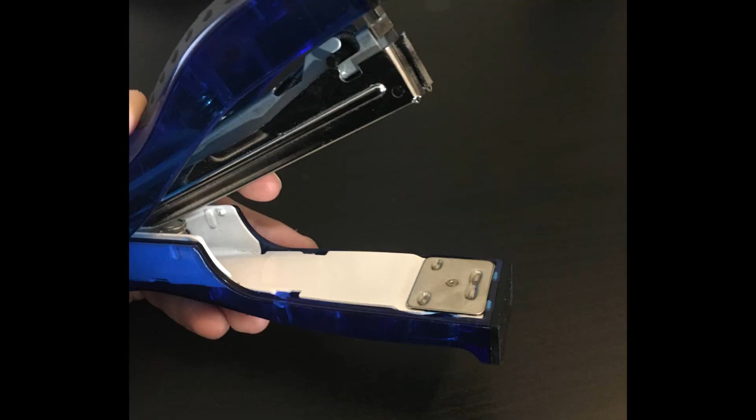The product our group chose to analyze for both manufacturing and assembly is a generic 20 to 50 page stapler.

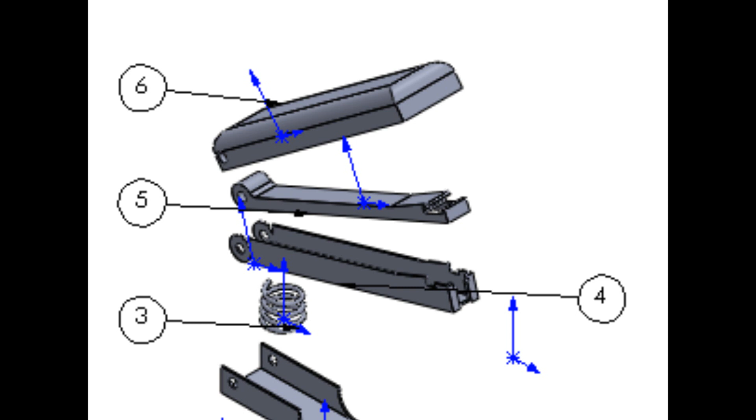The stapler is easily divided into two sub-assemblies, the first being the top sub-assembly, which houses the staples and driving unit. The primary task of this sub-assembly is to ensure that the cartridge of staples is always being pushed to the front of the stapler.

This ensures that the driving mechanism of the stapler always has an object to perform work on while the cartridge is not devoid of staples. This sub-assembly also performs the task of driving a single staple through a material situated between the two sub-assemblies.

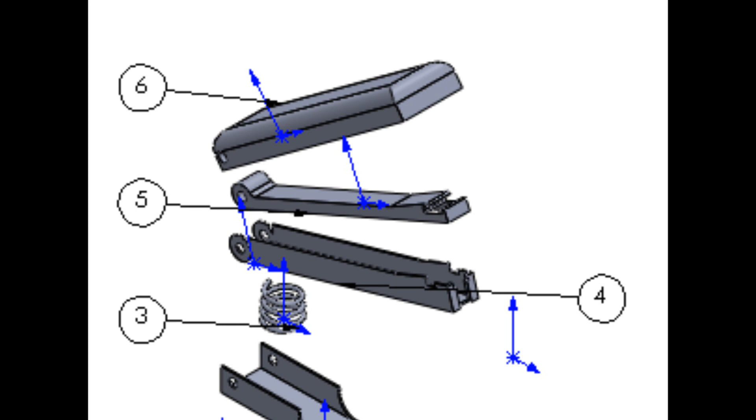The second sub-assembly is the base sub-assembly, whose significant features are the bending mechanism for the staple and the repositioning spring. The primary task of the base sub-assembly is to deform the staple being driven from the top sub-assembly.

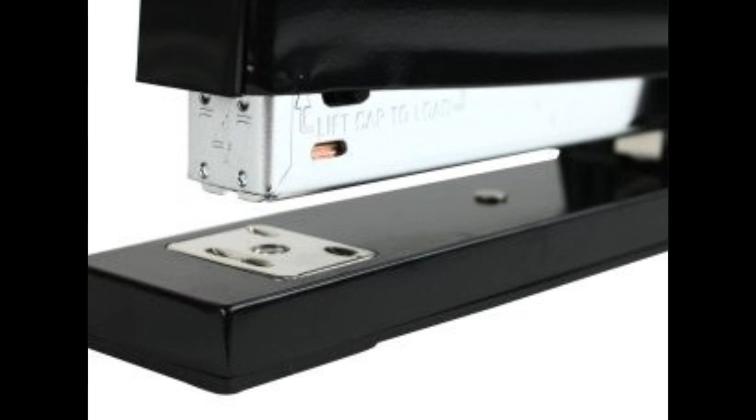This deformation is achieved by the imprint on the metal plate that is positioned directly beneath the driving unit of the top sub-assembly. In common staplers, this plate has two imprints that the user can choose from. Each imprint directs the staple's legs in different directions.

These two sub-assemblies are then attached together with a pin located at the pivot point of the stapling mechanism.

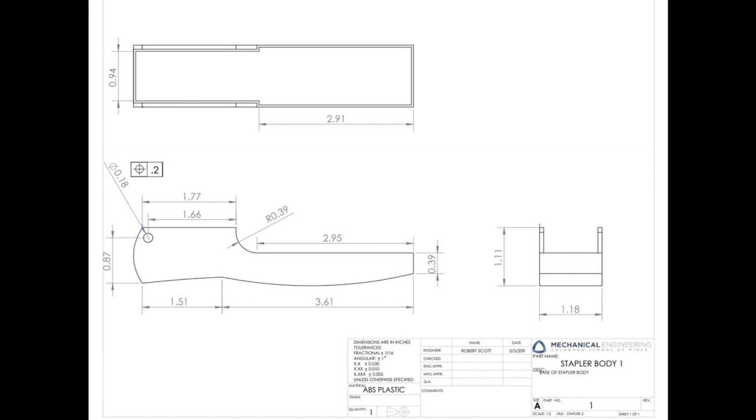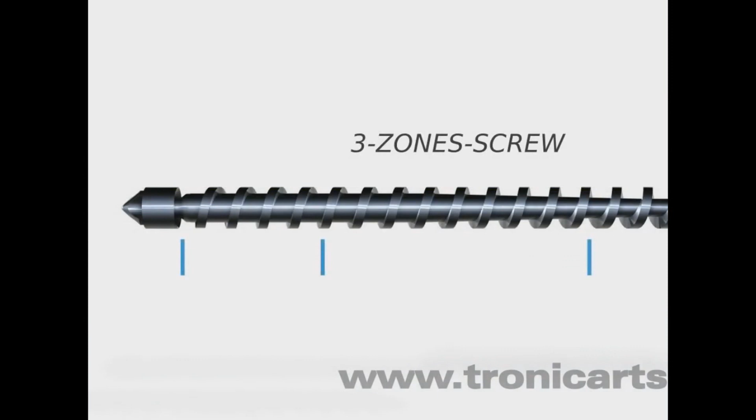The base of the original part is made of a thermoplastic. This was likely injection molded, which would have a high startup cost in the tens of thousands of dollars range for the mold. Similarly, the upper casing of the part was also injection molded. This would need its own mold and would have its own startup cost in the tens of thousands of dollars range.

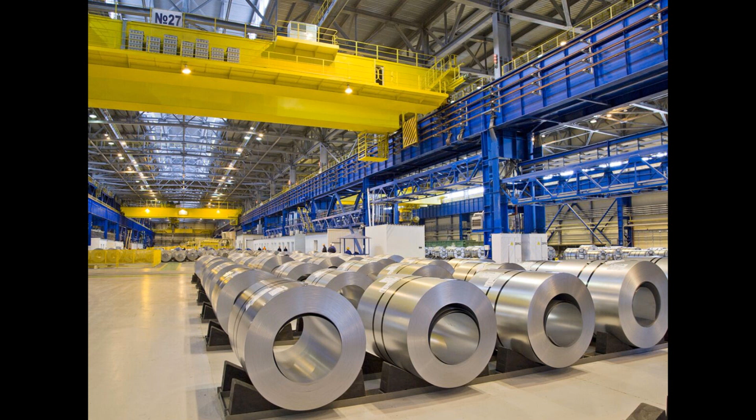The anvil, or metal base for the staples, is made of a flat aluminum metal. Likely, this would start with sheet metal that would be cut and stamped into a metal die to fit our mold. The half-inch metal spring between the anvil and magazine is standardized and can be purchased in bulk at around $2 each.

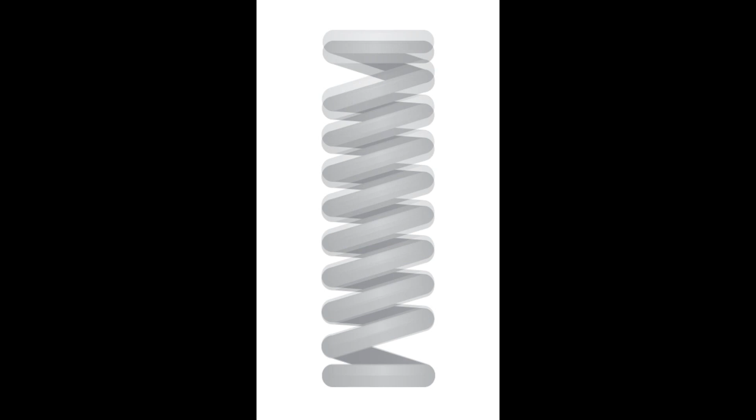Additionally, the 3-inch long compression spring that is used to push the staples out of the magazine is also standardized and can be purchased at around $1.53 each.

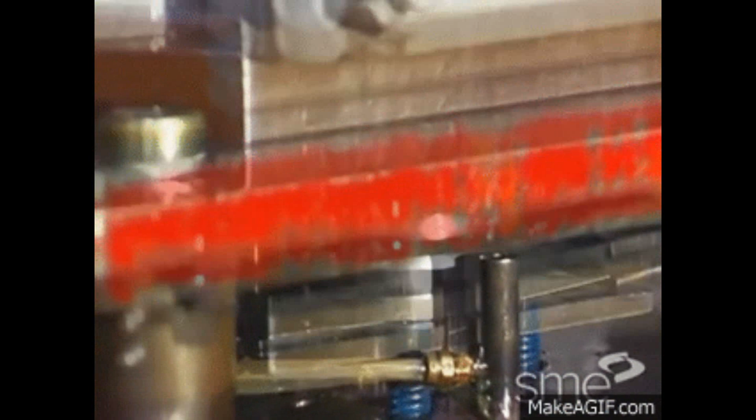The metal magazine is more complex and will require more steps to achieve tolerance. Likely, we would start with the sheet metal that would be stamped and cut to form the holes and edges. Next, this part would undergo additional stamping to bend the sides and front at 90-degree angles.

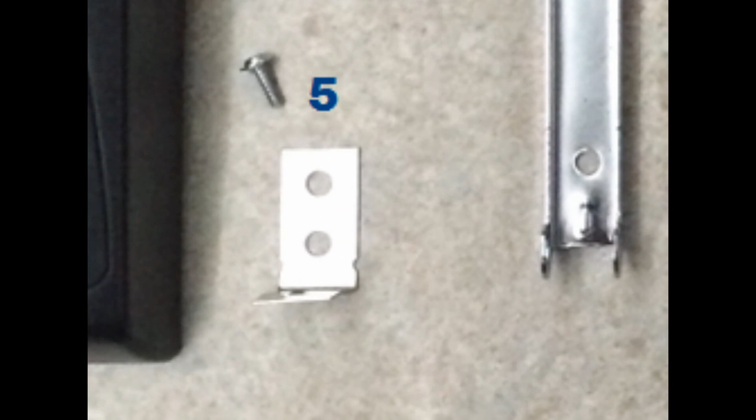The metal hammer would be formed similarly, starting with an aluminum sheet metal that is stamped and cut to form the edges and holes. The part would then be stamped into a die mold to form our desired curves and bends.

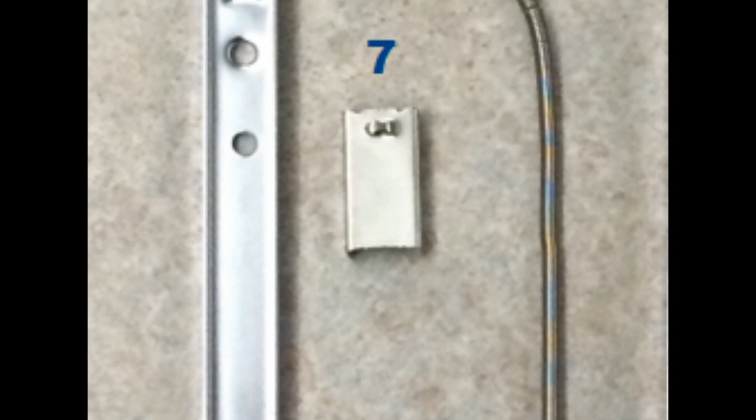The pusher could be made of plastic to keep costs down. This would likely be injection molded and made of thermoplastic. Because this part is not very complex, the mold would only cost a few thousand dollars.

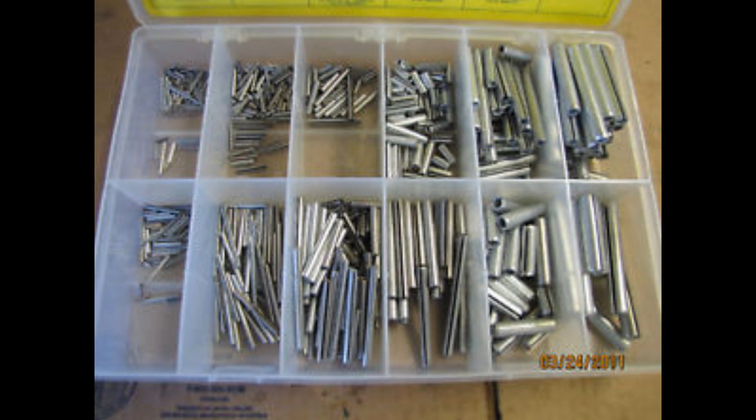Finally, the metal pin that is used to hold the stapler together is standardized and can be purchased in bulk. The original manufacturer likely made this part by cold drawing a stainless steel billet into a wire.

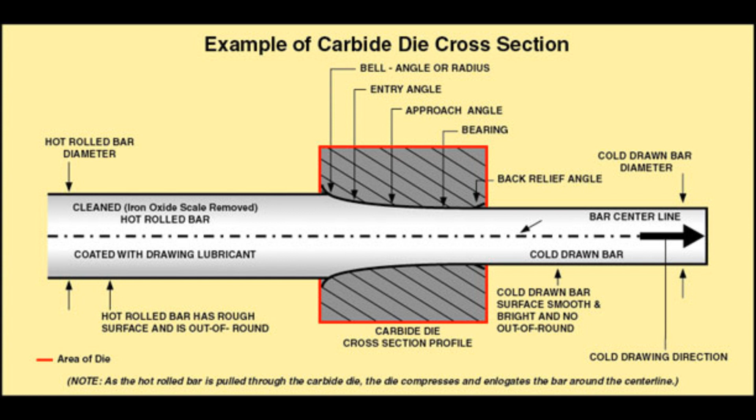In our new design for the product, we decided to modify the plastic injection molded casing that surrounds the stapler. Our new design would be one cohesive piece of plastic that would be connected at the end. This design will cut down the startup cost greatly because we will only need one mold for the casing as opposed to two in the original design.

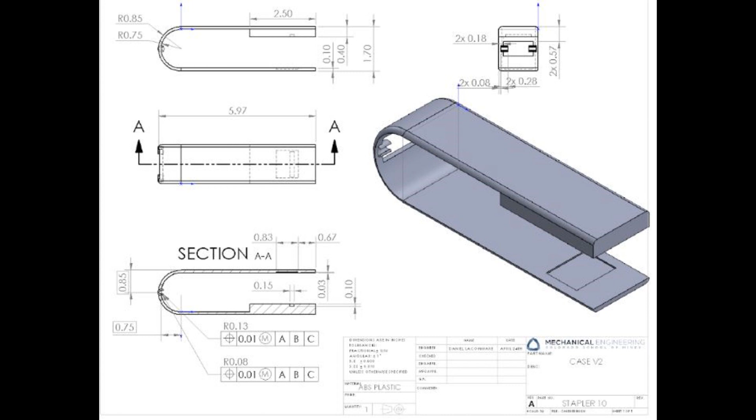In this design, we will have to modify the plastic we use, as it will need to be elastic enough to bend at the axis.

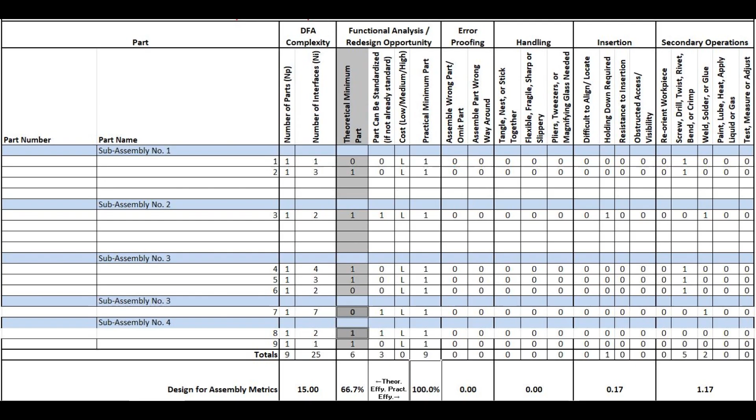In DFA analysis, it's very important to eliminate any unnecessary parts. In the original document for DFA, we found a couple of parts that were not needed. For example, the case as a whole, being two parts, could be simplified to one. There's also an extra spring that we didn't need, and of course a couple of extra components on the inside of the stapler.

The redesign has a couple less parts. It's now 75% efficient as opposed to the original design, which is about 66% efficient. So overall cost is going to go down for sure. All parts are used, therefore making the practical efficiency 100%.

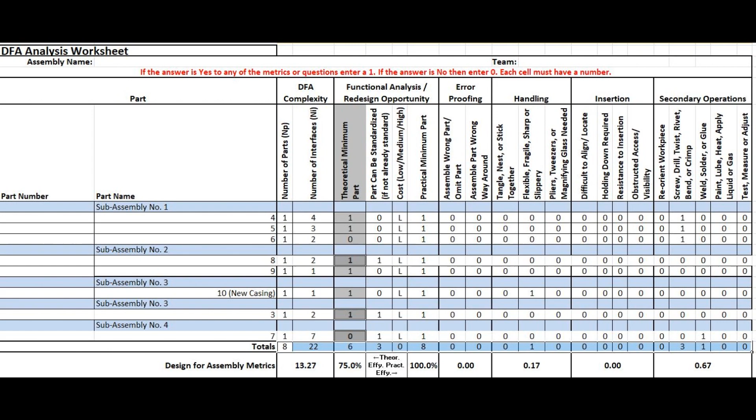As Daniel pointed out, the new redesign is going to have a similar manufacturing process. Since this is all ABS plastic, a good idea to do injection molding, as it would be very efficient, one of the cheaper options, and will not compromise on part functionality.